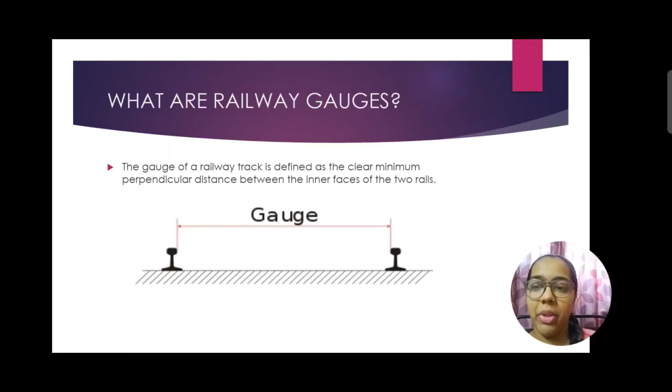The gauge of a railway track is defined as the clear minimum perpendicular distance between the inner faces of the two rails. There are four types of railway gauges. The different gauges can be broadly divided into the following four categories. First, broad gauge, which has width of 1676 mm to 1524 mm or 5 feet 6 inches to 5 feet 0 inches.

Second, standard gauge, which has width of 1435 mm and 1451 mm or 4 feet 8.5 inches. Meter gauge with width of 1067 mm, 1000 mm and 915 mm or 3 feet 6 inches, 3 feet 3 3/8 inches and 3 feet 0 inches. Narrow gauge with width of 762 mm and 610 mm or 2 feet 6 inches and 2 feet 0 inches.

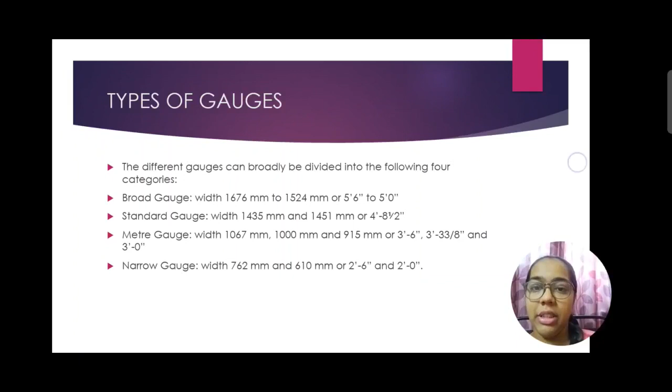Then the factors affecting selection of gauges are: first, traffic condition. If the intensity of traffic on the track is likely to be more, a gauge wider than the standard gauge is suitable. Second, development of poor areas. The narrow gauges are laid in certain parts of the world to develop a poor area and thus link the poor area with the developed outside world. Third, cost of track. The cost of railway track is directly proportional to the width of its gauge. If the fund available is not sufficient to construct a standard gauge, a meter gauge or a narrow gauge is preferred rather than to have no railways at all.

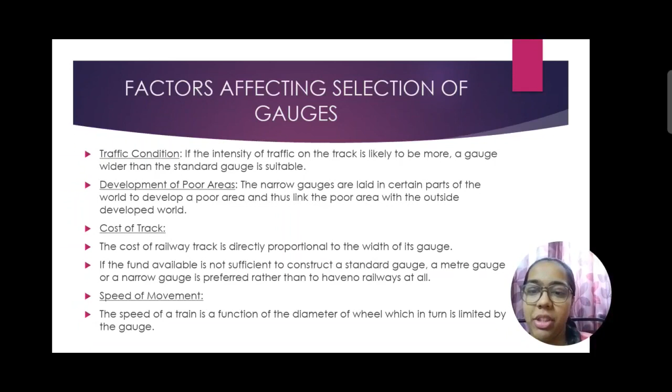Fourth, speed of movement. The speed of a train is a function of the diameter of the wheel, which in turn is limited by the gauge. The wheel diameter is usually about 0.75 times the gauge width, and thus the speed of a train is almost proportional to the gauge. If higher speeds are to be attained, the broad gauge track is preferred to the meter gauge or narrow gauge track. Fifth, nature of country. In mountainous country, it is advisable to have a narrow gauge of the track since it is more flexible and can be laid to a smaller radius on the curves. This is the main reason why some important railways covering thousands of kilometers are laid with a narrow gauge.

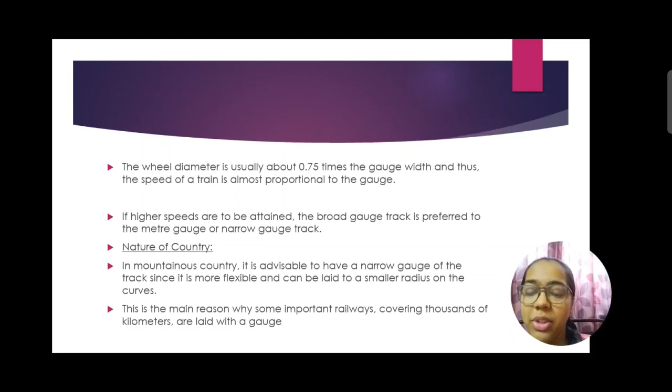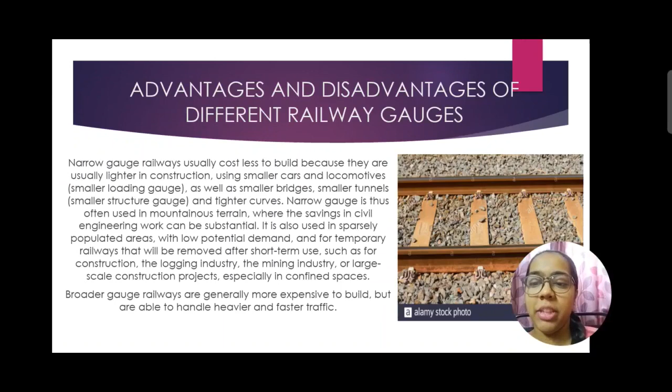Then, advantages and disadvantages of different railway gauges. Narrow gauge railways usually cost less to build because they are usually lighter in construction, using smaller cars and locomotives as well as smaller bridges, smaller tunnels and tighter curves. Narrow gauge is thus often used in mountainous terrain where the savings in civil engineering work can be substantial. It is also used in sparsely populated areas with low potential demand and for temporary railways that will be removed after short-term use, such as for construction, the logging industry, the mining industry or large-scale construction projects, especially in confined spaces. Broader gauge railways are generally more expensive to build but are able to handle heavier and faster traffic.

Now let us see what is a broad gauge. In modern usage, the term broad gauge generally refers to tracks spaced significantly wider than 1435 mm. Broad gauge is the dominant gauge in countries in the Indian subcontinent, the former Soviet Union, Mongolia and Finland, Spain, Portugal, Argentina, Chile and Ireland.